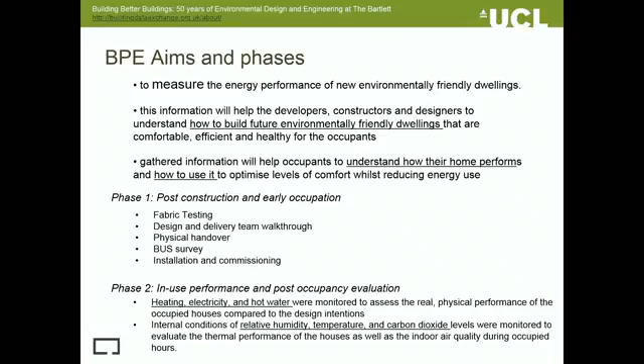And phase two, which is in-use performance and post-occupancy evaluation, which is the long-term monitoring, more than 2 years of monitoring. And we look at the heating, electricity, and hot water consumption and the internal conditions in each one of these properties: relative humidity, temperature, and carbon dioxide.

The first project is the Centenary Quay, which is a regeneration project being built in Southampton at the moment. It considers commercial and community space and the construction of more than 1,600 houses and apartments. The development is located in southeast Southampton. And the area that we assessed as part of the BPE was this one here, which comprised 168 apartments and houses.

The project also looked at these three terrace houses, which were constructed to Code for Sustainable Homes level 3. The heating and hot water is provided through a communal district heating, gas-led CHP unit, and gas boiler as a backup system. And the ventilation is provided by continuous mechanical extract in each one of those houses.

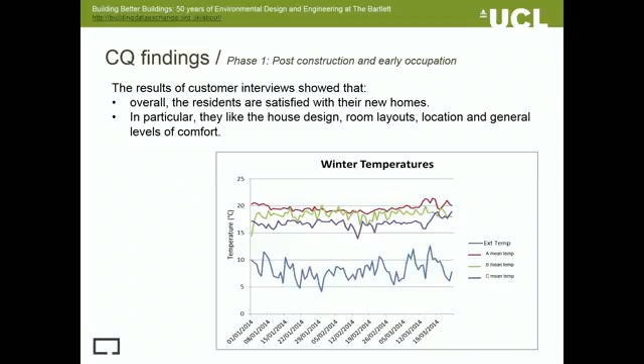Some of the findings. In general, people were quite happy with the location and the design of their buildings, the layout. They were quite satisfied with the comfort levels that the houses provide. And you can see here on the graph some of the winter temperatures, internal and external, of the three properties that we monitored. And you can see that the levels are actually quite good for winter months. And the difference between them is mainly due to the set point that residents program their homes to.

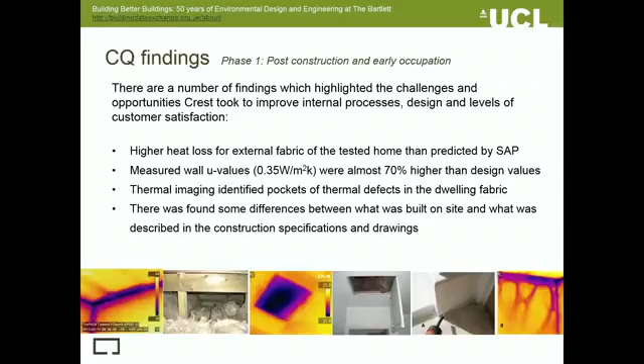In terms of the fabric of the building, we found higher heat loss and U-values compared with predicted values, being almost 70% higher for the measured U-value. This is not something uncommon in many buildings. Through the thermal imaging, we found a number of defects in the insulation, mainly wrong installation and lack of it in many points. And also we found some difference between the materials being used on site and those that were specified in the construction drawings. This turned out to be something positive: the quality of the materials being used on site was higher than the materials specified.

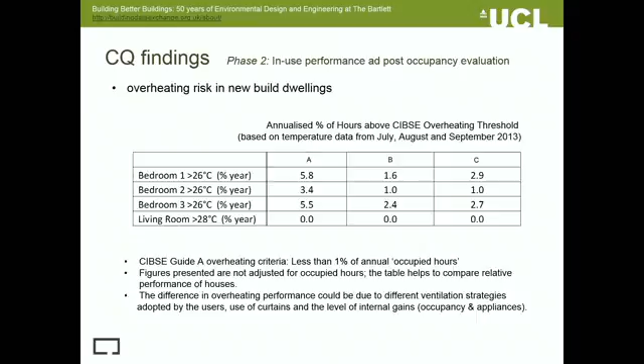We found a risk of overheating. Internal temperature during summertime in all houses exceeded the overheating threshold defined by CIBSE, mainly in bedrooms, as you can see for the three properties, A, B, and C, being monitored.

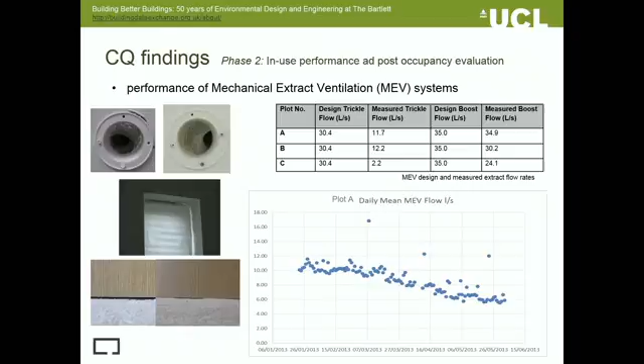In terms of the district heating, the overall performance of the plant was not as expected, which seems to be related to the power to heat ratio and the heat distribution within the development. This means that the carbon intensity of delivered heat is more than double what would be expected from individual gas condensing boilers.

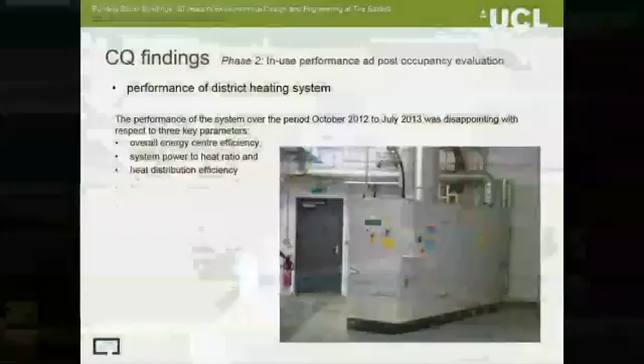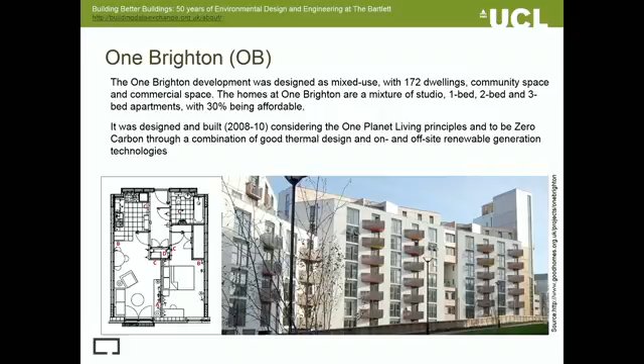Some of the findings. Occupants were quite happy with the many features of the building, the layout, the allotments provided, the bike storage, location, bins, but specifically they highlighted the green caretaker, who has a major impact on the good performance of the facilities in the building. Also, occupants reported that the apartments are in general comfortable, although many issues were raised regarding the ventilation system: excessive dust, poor control, and poor flow design.

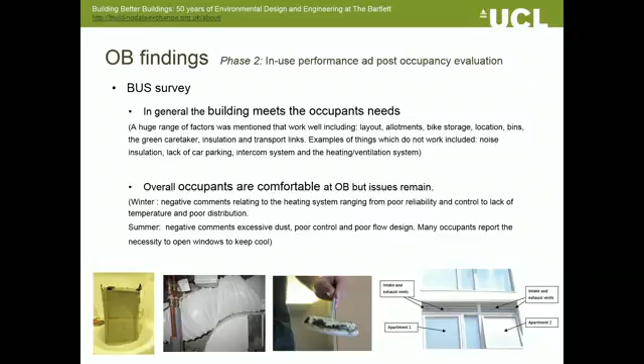You can see there one filter that we replaced after 3 months, and according to specification, it should be replaced every 6 months. Also, some issues in the design with the position of the intake and exhaust vents. They are less than a meter apart, but also they are less than a meter from the next apartment.

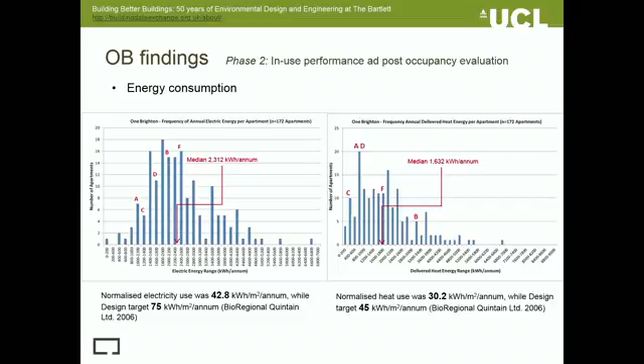In terms of the energy consumption, what is quite good, in the graph you can see the consumption of all apartments in One Brighton, 172, and specifically the consumption of the 5 apartments we monitored, A, B, C, D, and E, and F, sorry. The electricity and heat use is below design targets, 40% lower for electricity, as you can see, and 30% lower than the target for heating, which is quite a good finding.

We found that the efficiency of the gas boiler was good, as specified by the provider. This is related to the communal heating system. However, the efficiency of the biomass boiler was lower than the SAP calculations. Reason for this? Well, it was not used as expected, mainly due to equipment faults and issues with maintenance. As a result, carbon emissions were 10 times higher than predicted, which is quite high.

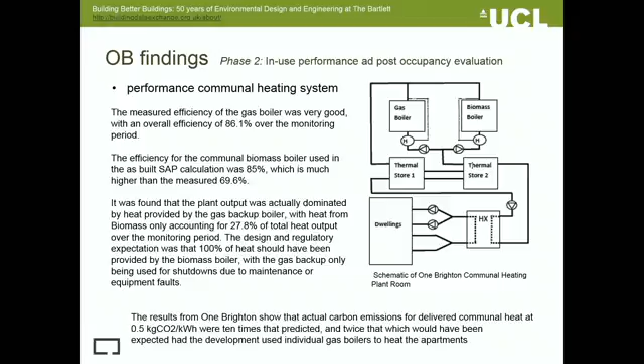So it seems that I have plenty of time now for the wider lessons, so it's great. So I put these 5 wider lessons. Evidence from both projects shows that there can be several errors in SAP inputs and inaccuracies in U-value calculation. This discrepancy is not unusual at all. In terms of the commissioning of the mechanical ventilation, the main issues seem to be poor installation practice and inadequate commissioning processes, which could greatly impact energy consumption, indoor quality, and

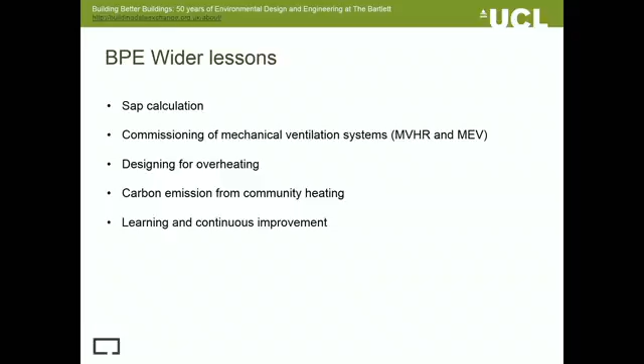mold growth and condensation. There is a high risk of overheating, which is likely to increase in the future with climate change. The underperformance of community heating schemes, if not addressed, will seriously compromise the CO2 emission targets set out by the UK government for the construction sector. And I put this final one with learning and continuous improvement. What I wanted to do here is highlight the approach of the developer regarding these findings. At the beginning, they were not at all happy with the findings. However, they took several actions to improve their design, the communication within the company, and the processes on site, which is something to highlight.

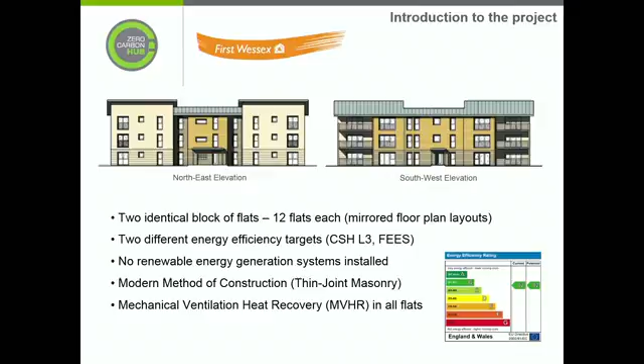There's no renewable energy systems installed here. We trialed a type of modern method of construction, a thin-joint masonry block. I'm sorry this keeps jumping forward. And all units had mechanical ventilation with heat recovery in, which is now actually a very common component and feature of new housing. So in terms of the difference in specification, it was actually fairly minor. The FEES block had an extra 50 millimeters of cavity wall insulation as compared to the code block.

We've gathered a lot of data about this project over a period of 4 years. The data was actually monitored by UCL. And it soon became quite apparent that there is evidence of this performance gap, and that this is representative of mainstream housing practice for new developments, unfortunately.

Got a mind of its own, this, sorry. Maybe someone's operating it, telling me I need to move on a little bit.

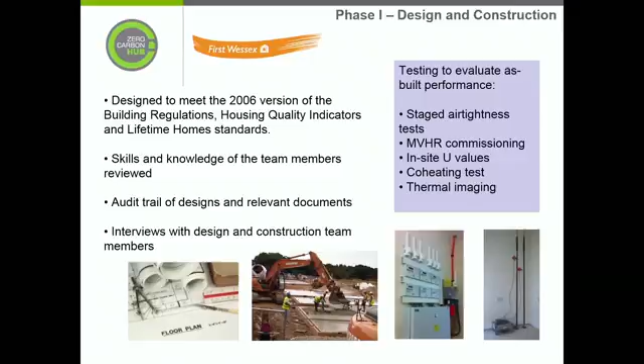But so in terms of testing, I'd like to draw your attention to that. We did some staged air tightness tests, not just a test at completion. There was a lot of commissioning on the MVHR units. We did in situ U-value tests, and a co-heating test and thermal imaging as well. We worked closely with the design team and the on-site guys, so they were aware of the study that we were going to be undertaking.

I did push the button that time, so that's good.

And one of the things we did find was that there wasn't really a clear definition of where the airtight and thermal barrier was within this building. And of course, that's important to identify so that we can avoid unwanted penetrations of that layer. Also, you can see here that there were some problems with the MVHR ductwork layout, some quite severe ones there. Obviously, we shouldn't be using any flexible ductwork. That system will not perform as it was intended, and it didn't, in fact, no surprise there.

But one of the things to note here is that this isn't just about on-site control. The builder here did have a bit of a difficulty because the way the timbers in the ceiling were arranged formed a barrier to him being able to get the ductwork through. So while on-site quality and overseeing that is very important, we all have a role to play in narrowing this performance gap.

I'd like to also draw your attention to, you can see there we've got some thermal bridging, actually quite severe where it's white. That probably suggests there's a bit of moisture in the cavity there. One of the reasons for that was when the blown beads were put into the cavity, you can see that they didn't make their way through the lintel profile here.

One of my favourite slides is this Juliet balcony here, which you can see is fixed back to the wall and is in fact acting a bit like an external radiator. So it's very nice for keeping your hands warm when you're being serenaded from the pavement.

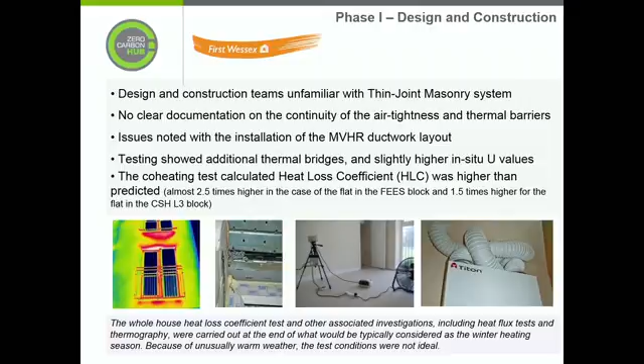So we did post-occupancy evaluation on 3 different flat type typologies. I won't go into a lot of details about those, but there were varied levels within the blocks. And the monitoring program, we had meters on all the gas installations, the electrical installations, water, and we also looked at electricity to the MVHR units. In addition, we looked at the internal conditions, very important for the occupants. So we had relative humidity sensors, CO2 sensors for air quality as well.

Okay, I've got to keep up with these slides.

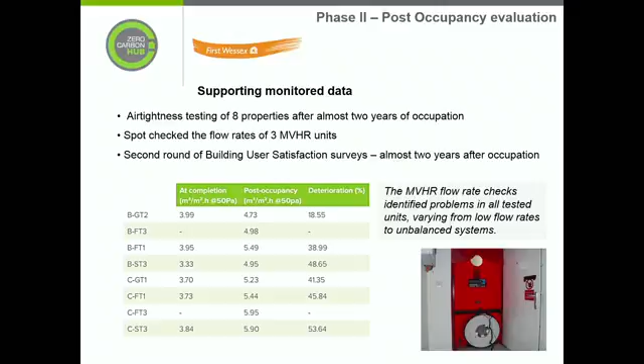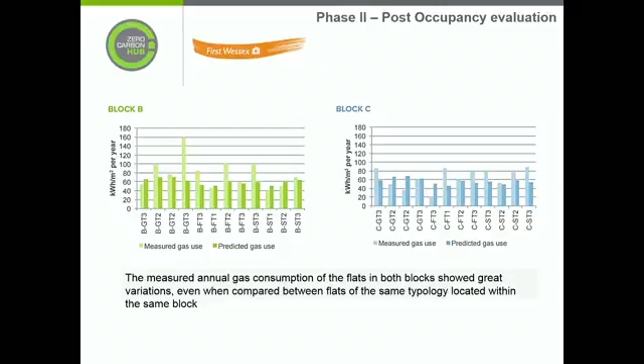But I think what's most interesting here is coming back and doing the testing 2 years on. You can see the degradation or the deterioration in that air pressure test results, one of them actually getting worse by over 50%. Some quite big variations, no surprise, in the actual annual gas consumption measured data here. And of course, this is subjective to the occupants, and would suggest that we probably need a much bigger sample size if we really wanted to learn something from this.

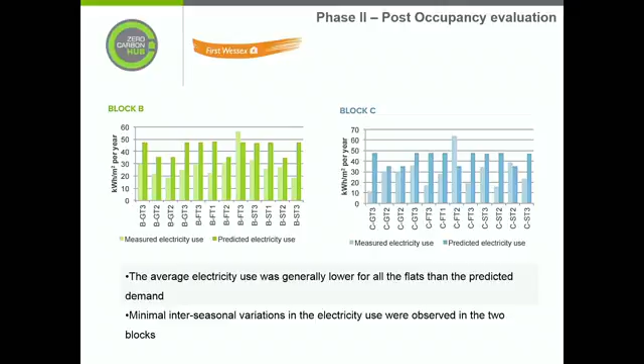The predicted target here for the code was 105 litres a person per day, and again, there was a mix of consumption there. I did actually monitor one scheme with the Environment Agency, and we had extremes of as high as some people using 300 litres per person per day of water in their flat with no apparent leak.

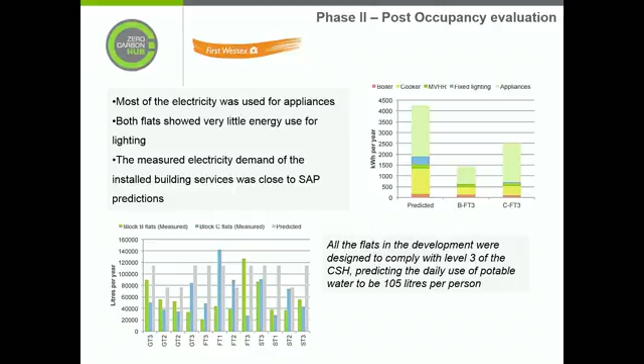So we used a BUS survey, which I'll tell you a bit more about shortly, to have a look at the occupant satisfaction, the POE here. And what we found was the normal euphoria of getting your new home. Everyone's very happy, more interested in getting the furniture through the door than someone coming out to ask them what they think about the new home. But when we went back slightly later, that had dropped off a little bit. People still generally happy, but not quite as high as when they moved in.

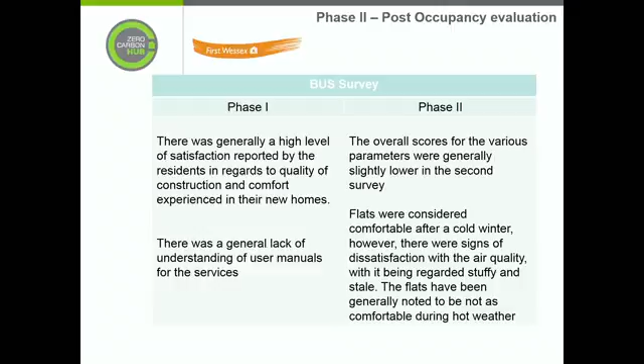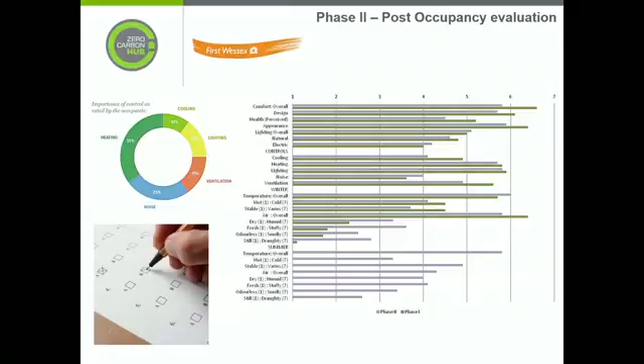But there was certainly a general lack of understanding of home user manuals. They weren't presented in the most clear manner that would really benefit the residents. Residents also reported that they were generally comfortable throughout winter, but when it came to summer, there were already some grumblings about it getting a bit uncomfortable during the summer period. The BUS survey is measured on a scale of 1 to 7, don't ask me why, but fairly decent satisfaction levels there with the units.

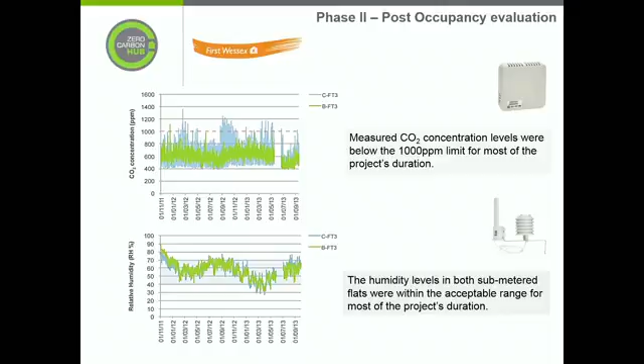Here we can see the parts per million of CO2 measured, which gives us an indication of the indoor air quality, and pretty well we were below the 1,000 ppm threshold, so that suggests that we have satisfactory indoor air quality. And similarly, humidity levels were within a good range. Hopefully the MVHR was helping there.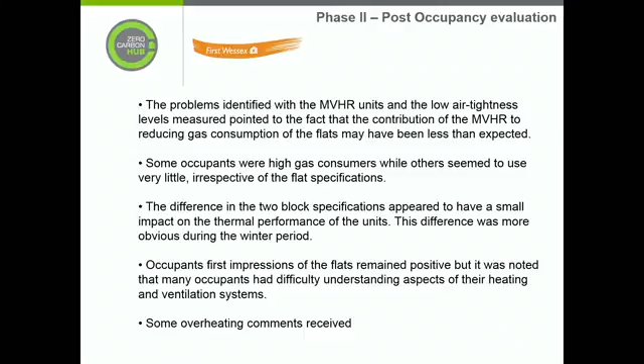Because we had problems with the MVHR, I think that the MVHR actually had to be commissioned on 3 occasions, and it wasn't right each time. They hadn't got the airflows and the balancing of the system right. So this is a problem: the people installing this were convinced that they commissioned it correctly, but it just wasn't balanced each time it was checked. As you could see, there wasn't fantastic continuity of the insulation in the fabric through the thermal imaging that was carried out, and some overheating issues were noticed. I'll go on to that.

I know the Hub are doing a lot of work on overheating, and I really say to you, this is the issue that we need to get a grip on in the very near future. Actually, I think this is going to be one of the things that could really make our homes unsuitable to live in all year round, which makes them unsustainable for a new home.

At First Wessex, I don't mind saying that we have got a lot of overheating problems. We've been honest. We know we're not alone. It's not peculiar to us. So we're trying to assist with understanding what's going on here.

We have a lot of new flats with communal heating systems, and we've been doing monitoring over 2 years, getting a lot of data, and at least a third of those are failing the CIBSE TM52 standard, and a lot of complaints, really uncomfortable. We've had residents of one scheme actually remove a window that was restricted. Such was their frustration to take that window out.

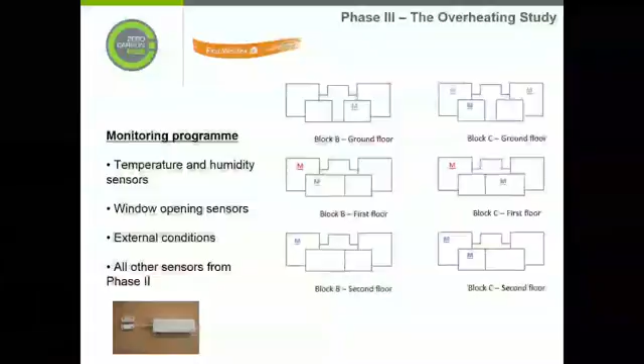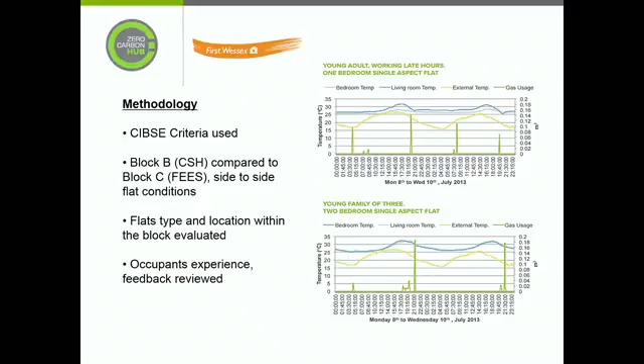Again, you can see here where we monitored the different units for overheating. The monitoring actually extended to having sensors on the windows, so we got a good understanding of what was going on. I won't go into too much detail about these results. You can take a look at the slides afterwards, but again, we did have some flats in this fairly typical low-rise flatted development which were failing the overheating tests.

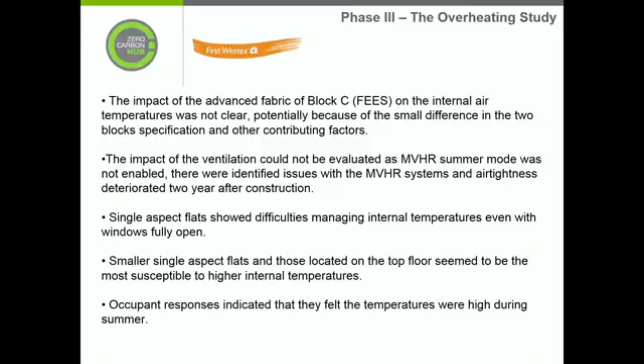So just drawing towards a close here. As I think I've already said, there's very little difference between the FEES and the code blocks. The MVHR, we weren't going to get the best out of that because the air tightness wasn't really as low as it needed to be. But with overheating, it's particularly the single aspect flats with windows which are often restricted, trying to stop people from falling out of windows. So we do have a lot of unintended consequences there.

So just drawing it to a close, what's important for First Wessex now is we take the learning from these BPE programs and put them into our design guide, so we hopefully don't fall into the same trap when we're delivering more homes in the future.

I've really enjoyed working with the Zero Carbon Hub and Innovate UK. The Hub have really got a very important role to play. They've been fantastic at bringing together all stakeholders across industry, and I really feel this work must continue. It is that important. If we're looking at a new affordable home in London being £460,000, probably the largest investment anyone will make, we really do need to narrow this gap in performance and actually eliminate it, because no other sector would get away with this.

To know if we could do better next time, and we wanted results with the veracity given by academic partners. So of course we got the best academic partners from UCL. I was hopeful of good results, and I wanted to use the results to influence government, industry, and the general public. So this wasn't a commercial enterprise. It was primarily to try and influence people. That's why I came to architecture, not for commercial reasons, but to try and find ways to help make change in a really problematic sector of the economy.

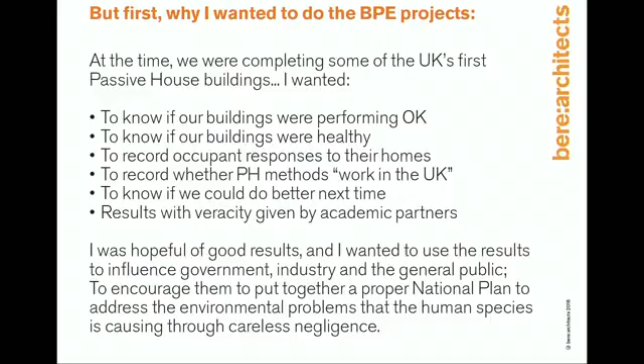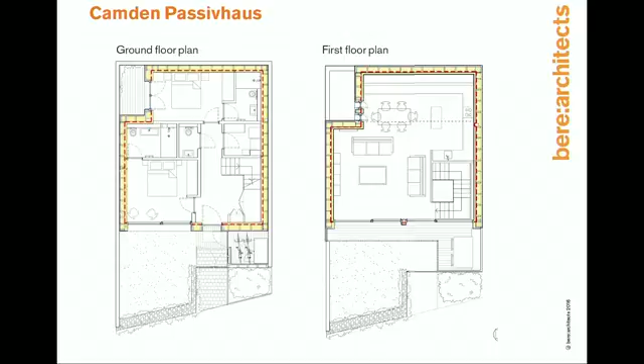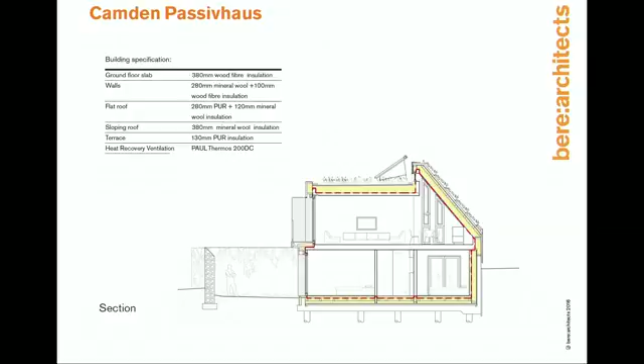So firstly, the Camden Passivhaus. The team you can see there, it's a domestic house, North London. Quite light in area and conventional, modern, contemporary house, looking from the inside. Plans, you then notice relatively thick walls. Line of air tightness noted in the red, which is very important, as Paul just mentioned. And the build-ups, quite substantial amounts of insulation, getting to generally U values of 0.1, that sort of thing.

So then the first BPE results. The air tightness achieved was better than the passive house requirements. The tracer gas tests, which were done by UCL to verify the pressure air tests, really confirmed that. Co-heating tests: Sam Stamp of UCL is doing a PhD here. I think he's just passed his Viva.

He did 2 tests. The first one was when there was quite a lot of sunshine, so he came back a year later and did another one, because the first one was a bit optimistic. The second one was showing that the building is actually performing slightly better than design in overall heat loss. An in situ heat flux, so checking all the U values, and again they were conservative by design, so they were actually slightly better than design.

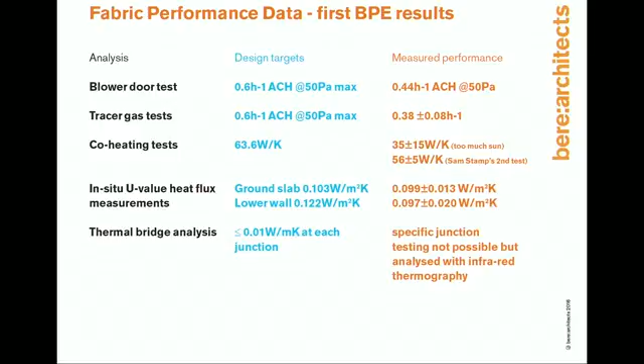And thermal bridge analysis, so there was a thermal bridging study and a thermography study, and results were pretty good. Sam Stamp then noted in his second report that Camden Passivhaus is one of only a few co-heating test dwellings that meets its design intent, and so we're very pleased with that, and very reassured that what we're doing was a good approach.

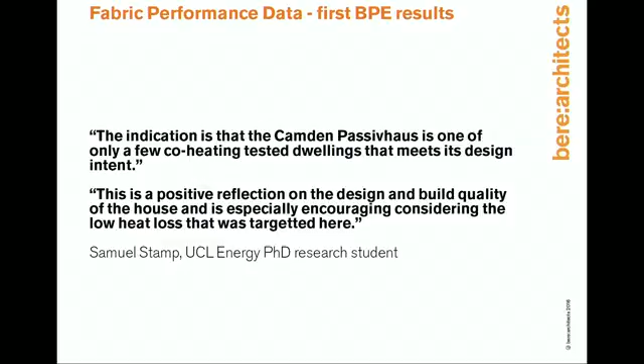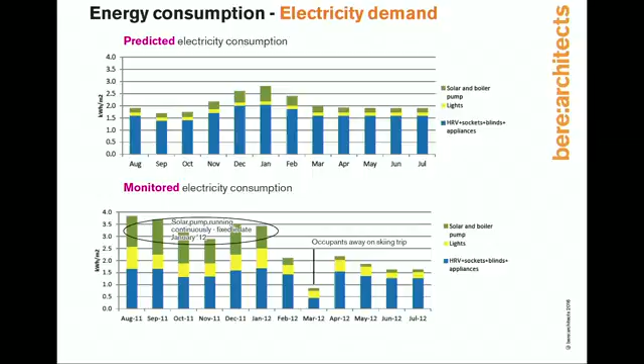And then electricity demand, predicted and monitored. There was a little bit of a problem at the beginning where a solar pump had been incorrectly wired and it was running constantly. But once that was sorted out, the overall electricity result was very close to the design. Lights tended to be left on, and if lights weren't left on as much, then we'd probably be consistently better. Some of those columns are better than predicted.

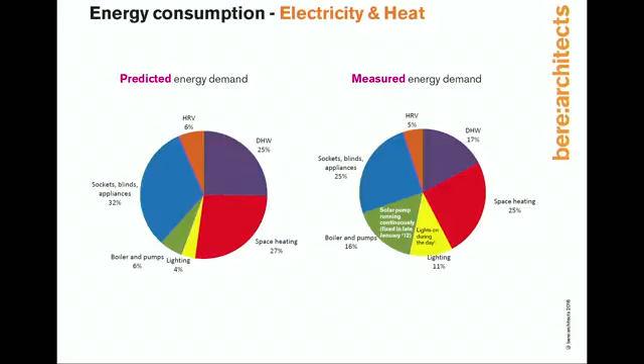And then dividing up the pie of energy use, you see space heating is roughly the proportion that was predicted. Sockets and blinds were less. So it's the lights that are a little more, 2 or 3 times more than design. And then monitored versus predicted space heating demand: every month except one, the monitored usage was better than predicted.

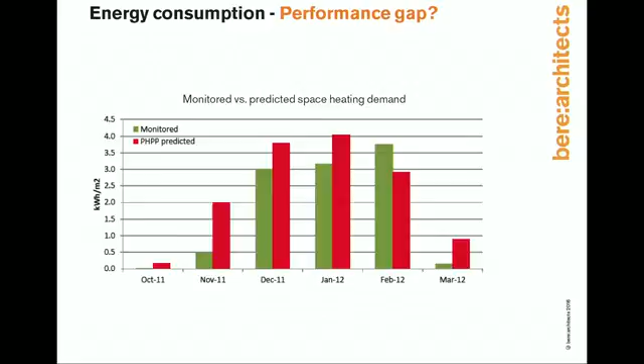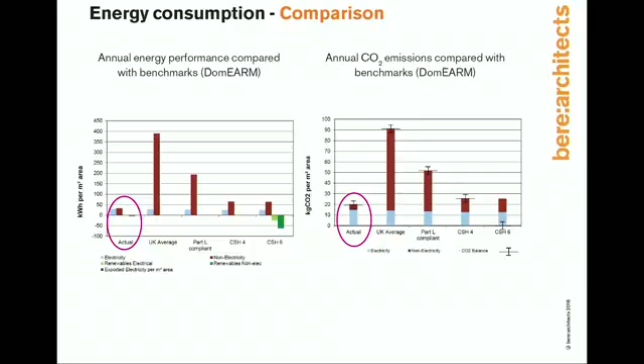Compare that with the annual energy performance with benchmarks, and again, really very encouraging. Even if you look on the left-hand graph compared to the energy use aspirations of a Code 6 building, very good. This building didn't have the PV on the roof that the Code 6 building obviously does have.

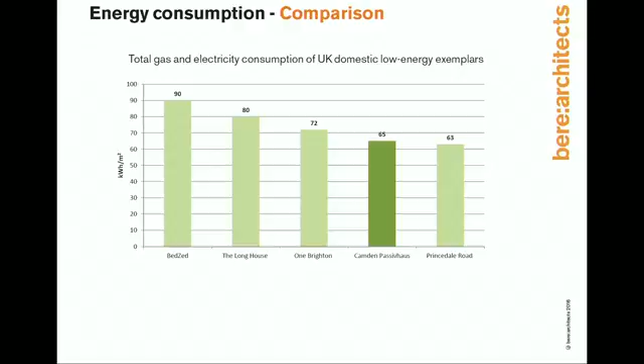And then looking at overall gas and electricity consumption compared to the other top performers in the UK to date that have been monitored. Princedale Road is another passive house building, and it's a terraced house. This is a detached house. It's very, very encouraging.

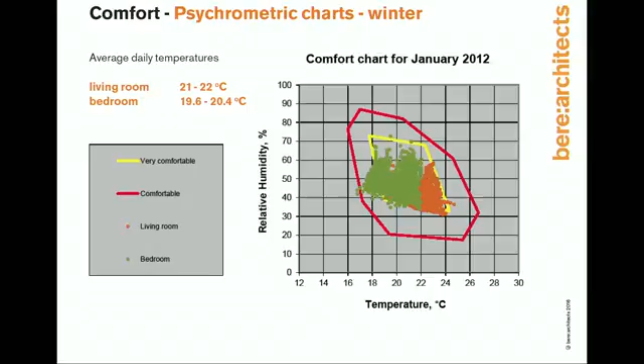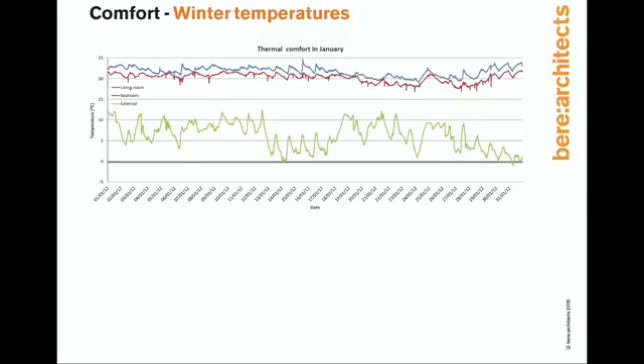Psychrometric graphs then. January, typical winter temperatures, the combination of temperature and relative humidity is up in the very comfortable zone, and you can see the green at the bottom is the outside temperatures fluctuating pretty steeply, and look how relatively small the fluctuations are on the internal temperatures in the winter.

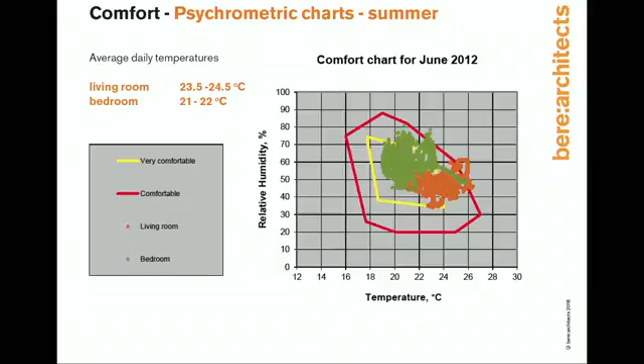And then in the summer, mostly very comfortable, some of them wandering out a little bit of the CIBSE guidelines. But look at the big spikes on the green again in the summer of external temperatures, and look how smooth the inside of the building is and how it irons out those fluctuations. We can perhaps talk about overheating in the questions.

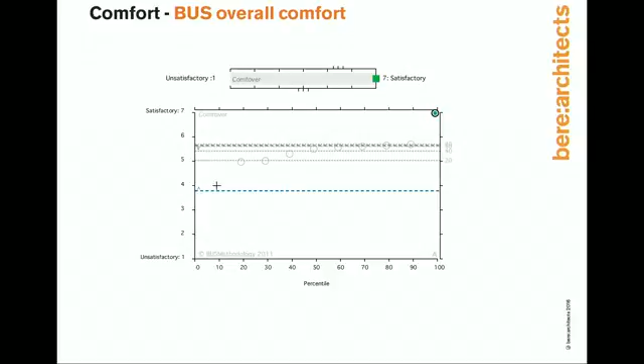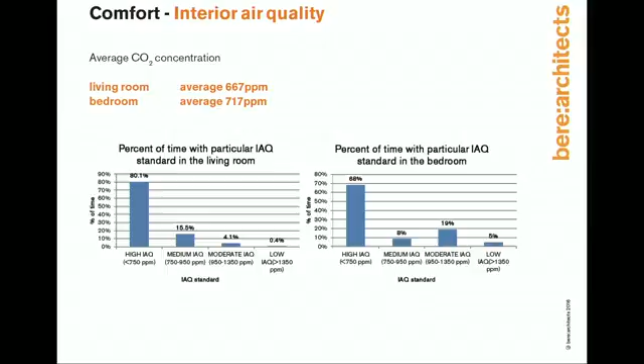Then the overall comfort of the occupants: they've classified it as really top points. CO2, for air quality. The air quality most of the time is classified as high, and the less satisfactory is very occasional. Usually it's just for about 30 or 40 minutes after a shower, there's a spike, and that's quickly whisked away by the heat recovery ventilation. And the perceived health of the occupants in the last survey: they regard the building as more healthy.

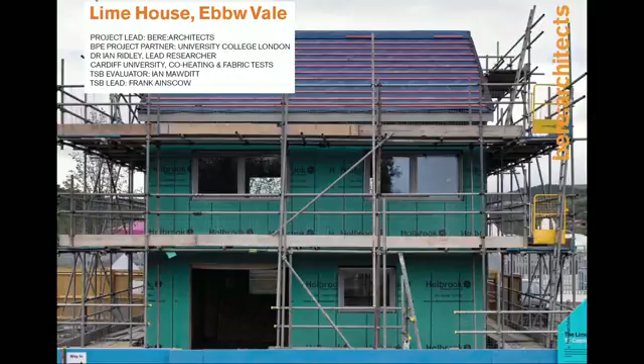So then, hopefully, we'll be a bit quicker on the Lime House and the Larch House. Again with UCL, and we started off with Cardiff University on the co-heating and the fabric tests. Haven't got the co-heating results here, but they're similar. They're very, very close to the predicted.

So the approach there, similar. This was using Welsh materials. In the Lime House, we were pretty well totally Welsh materials. We even designed and had certified and manufactured passive house windows made in Wales. And you can see the line of air tightness again in that diagram on the right as you zoom in,

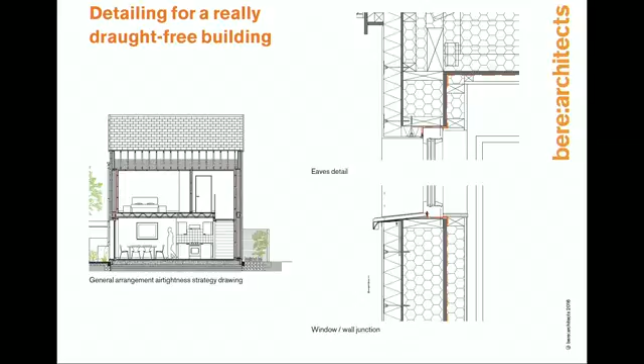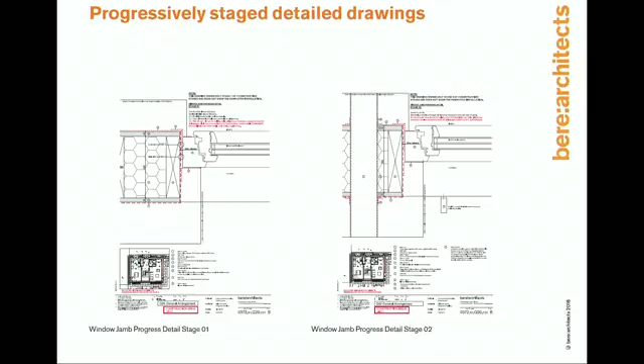always really, really important. And then because we were teaching people who hadn't done this before, we had the idea of doing staged drawings. So you can see this is the first two stages, and then the drawing builds up. So they get things in bite-sized chunks, rather than looking at the drawing on the right and thinking, how the hell, where do I start?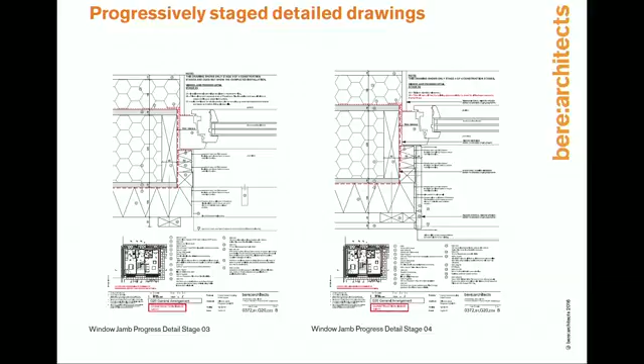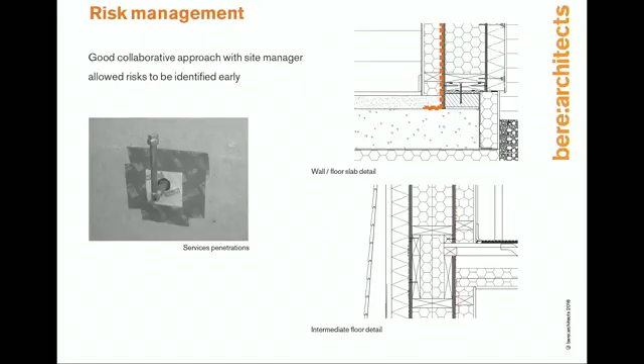And then risk management, so discussions with the contractor on air tightness techniques and so on. And note on the left the services penetrations. I think most people know about these gaskets now, and that's there for a future supply. But never assume that message has got through,

because one of the first findings we found in the BPE was thermal imaging that there was a big cold patch behind a BT box, and it turned out that a BT person had come on a day when the site manager wasn't there, and drilled a hole right through and then covered it over with a box for future. So it wasn't evident what he'd done.

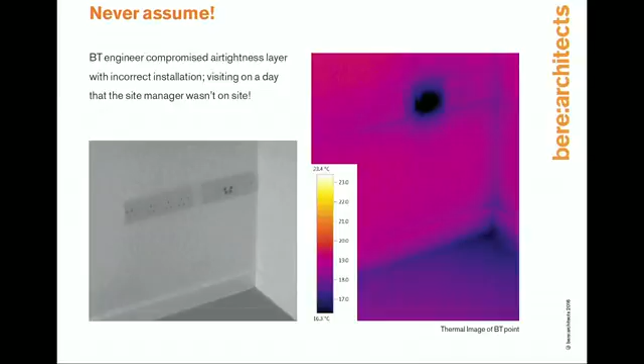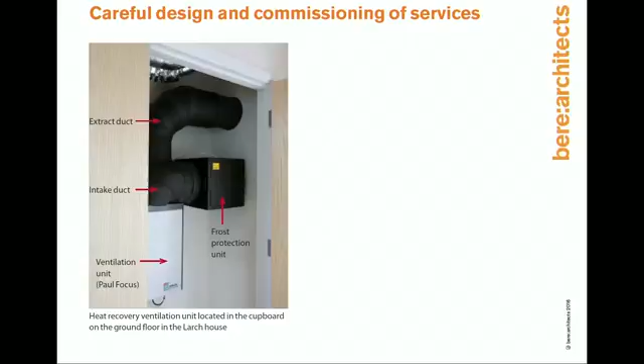The heat recovery ventilation design and commissioning, really, really important. It's possible that Ian Mawditt might have something to say about that if he's here. I know he's doing a meta study. I can't really say anything about that, but it's very, very encouraging across the BPE projects how some buildings are performing very, very well in their heat recovery ventilation, and a lot of that I have to say is down.

I unashamedly mention Andrew Farmer, the Green Building Store, who is absolutely superb in design, and if you get him to do your heat recovery ventilation, you will not have a problem, I'm quite sure, as long as you've got even semi-diligent workmanship, because he'll find any problems in the commissioning.

But one of the real problems is people changing filters. And you'd have thought it was a very simple thing for people to do. Set a timer, set an alarm in your diary and change it. But people don't. And I think there's a real business opportunity for someone, and I try and get Green Building Store to do it, but it seems to be too much for them to take on.

But someone could find out who's got heat recovery units installed around the country, and there are now plenty of them to surely make a business once a year, just turning up and changing the filters and charging via direct debit an annual charge for doing this. Well, actually, I would say more than once a year, once every six months, really.

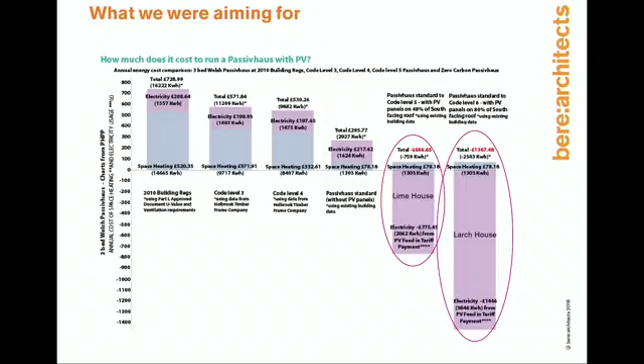So what we were aiming for in the Lime House and the Larch House on the right-hand side was the PV giving us sort of negative bills. We didn't achieve the generation that we had hoped. The electricity demand here against the typical UK is that slightly greyed out one, and the Larch House with that spike is what

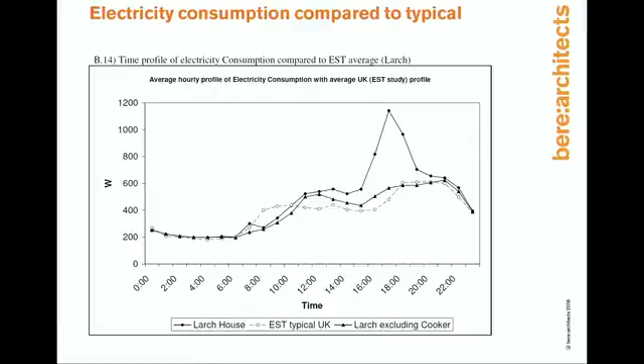actually happens, and that's because between about 4 and 8 o'clock they do a lot of cooking, and in Germany people in social housing do have their cookers and kitchen appliances provided for them, and they are triple A rated. But here the tenants bring their own, they bring the cheapest possible, and they're pretty energy consuming. So in the context of everything else being very low energy, that explains that spike.

I haven't actually checked the results. If anyone's doing a study and would like to carry on doing some monitoring, the equipment is still in there monitoring data, but the tenants have got a much more efficient cooker now, which they said they were going to try. It's some kind of infrared thing on a tabletop. They said it used a lot less energy. So

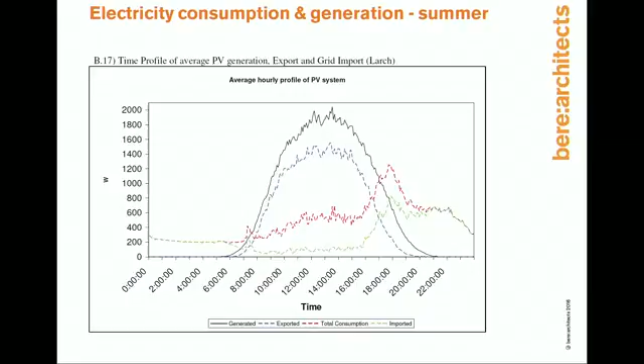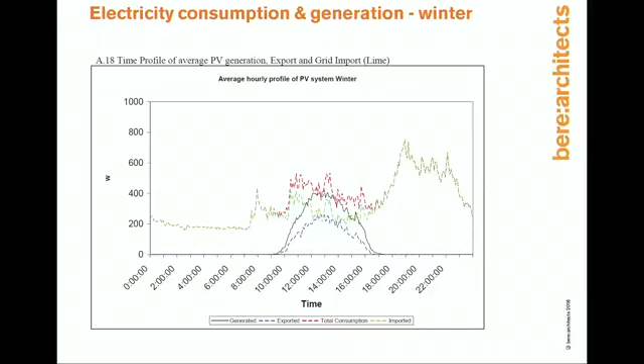Two minutes. So this is summer generation against use. In the summer, this is the Larch House, it's generating a lot more energy than it's using during the middle part of the day. In the winter, not. And that's what we are now concentrating on in projects. We need to be doing what we're doing in the summer in the winter in order to reduce peak load demand. And that will then mean that money can be diverted from power stations into buildings, if we can reduce that peak load, and we're doing it now. It's not that difficult, I should say.

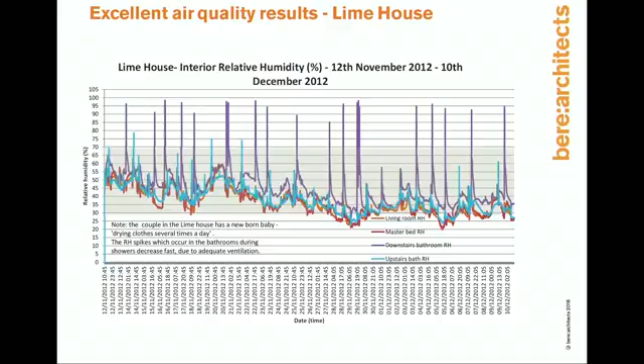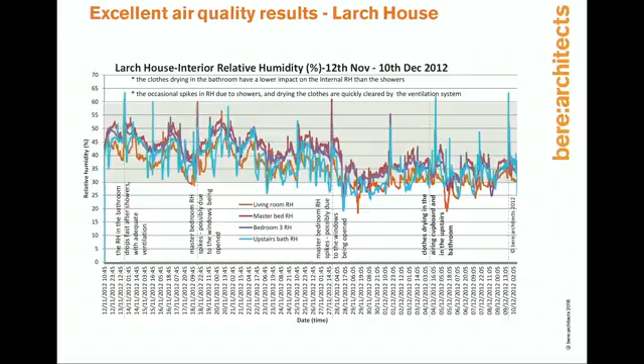Humidity levels all within the optimum band. That slightly greyed out band, pretty well all within the optimum. Larch House as well. This is winter humidity. Those little spikes are just showers which just quickly whisk away.

There's a graph that roughly equates to 5% energy rise. It's £170,000 over 50 years, and all for the sake of £35,000 now. Now, don't let anyone say, where are we going to find the money for this? Without first asking, where are those people going to find the money? Because they're going to have a much, much bigger problem than we've got. We've simply got to find the money to do things properly.

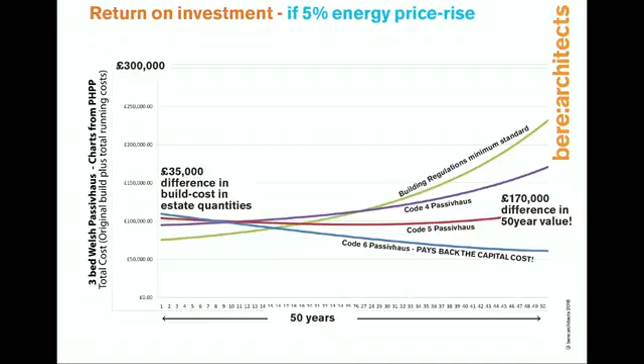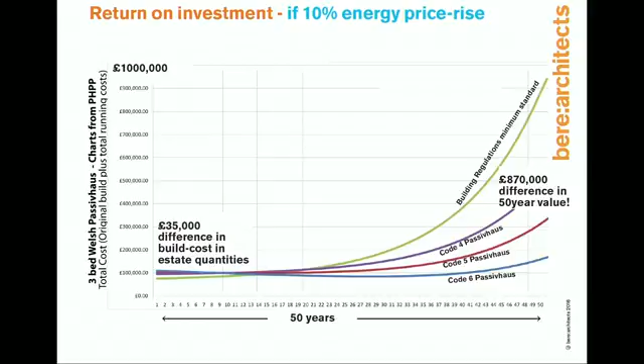And that's what happens if we get a 10% energy rise. Are we really seriously going to be, without any concern, passing that on to the next generation? So that's what we learnt, and I'll stop there.